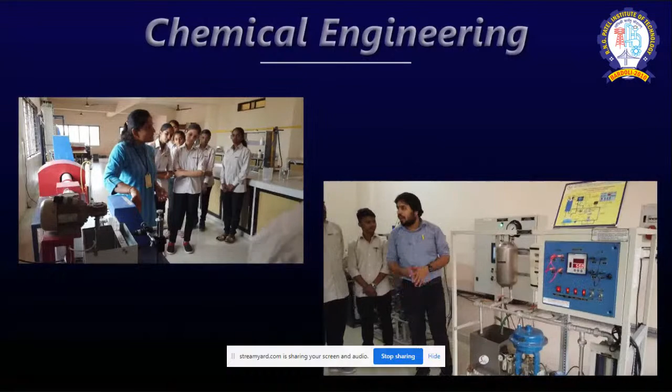The institute has 5 engineering streams: chemical engineering, civil engineering, computer science and engineering, electrical engineering, and mechanical engineering. It has 7 departments, including science and humanities and workshop, with a dynamic curriculum, a robust and talented pool of faculty members, and state-of-the-art infrastructure in all departments.

It is well known for imparting quality education, active research, and nurturing students for holistic development, achieved through student engagement tools like continuous evaluation, practical-oriented learning, departmental electives, soft skills development, and many more.

Recently, RNGPIT has started an AICTE approved and Gujarat Technological University affiliated 3-year industry-oriented graduation program, Bachelor of Vocation, based on skill development higher education. The institute has 3 BVOC courses: BVOC in software development, BVOC in production technology, and BVOC in refrigeration and air conditioning.

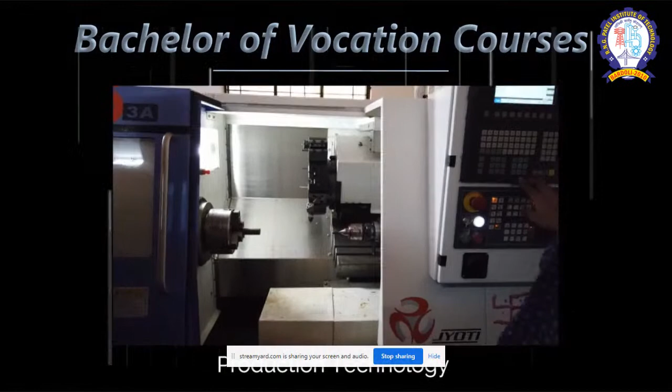The institute has organized 144 expert talks, 165 industrial visits, 90 workshops, 76 seminars, 32 STTPs, and 20 faculty development programs till today. The institute is proud of its academic results.

RNGPIT is continuously securing top rank at state level and zone level in Gujarat Technological University.

India's first common engineering facility center, governed by Setu Foundation, is being developed at our college campus.

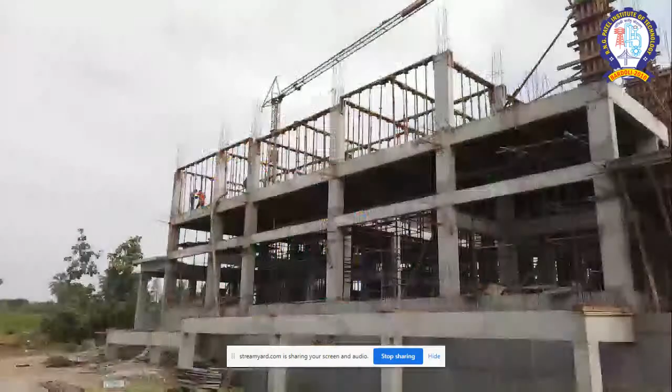The institute has signed MOUs with UGEC Powermax Private Limited Vadodara for skill development and industrial training in wind energy, with Aspiring Minds Gurgaon for job placement, with Trivedi Global Education Mumbai for guidance on higher education abroad, with E-Yantra IIT Bombay for development of a robotic laboratory, and with Reliance Jio for development of a recruitment and training center in the field of ICT.

Training and placement cell of the institute is active and alive. RNGPIT has organized 2 job fairs in association with Directorate of Employment and Training, Government of Gujarat, and NG Patel Polytechnic, and 2 IT job fairs in association with Surat IT Company Owners Association, SICO Surat.

The institute has started an SSIP cell for development of innovative projects and patent generation. Various projects done by our students have been presented at National and International Expos and Enclaves.

RNGPIT has established an NPTEL local chapter for various online courses provided by IITs. The institute has run various skill development courses free of cost under Pradhan Mantri Kaushal Vikas Yojana, approved by National Skill Development Corporation.

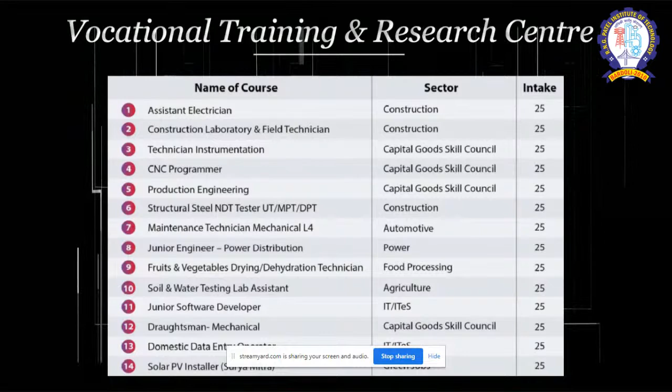RNGPIT has developed the Hansaben B. Poonawalla Vocational Training and Research Center with 14 advanced, well-equipped laboratories.

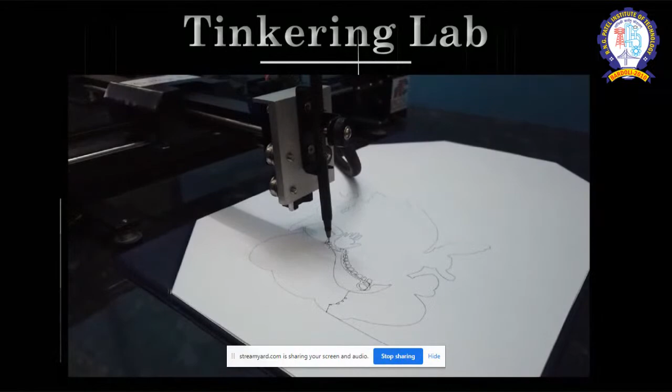The institute has developed a Tinkering Lab in association with the Student Startup and Innovation Policy Cell, Gujarat State, in which students can enhance their knowledge in the fields of IoT, robotics, artificial intelligence, 3D printing, calligraphy, and many more.

The Chemical Engineering Department of RNGPIT is recognized as a Schedule 1 Environmental Auditor by Gujarat Pollution Control Board Gandhinagar since 2012. The institute has around 40 industries allotted by GPCB for their audit work.

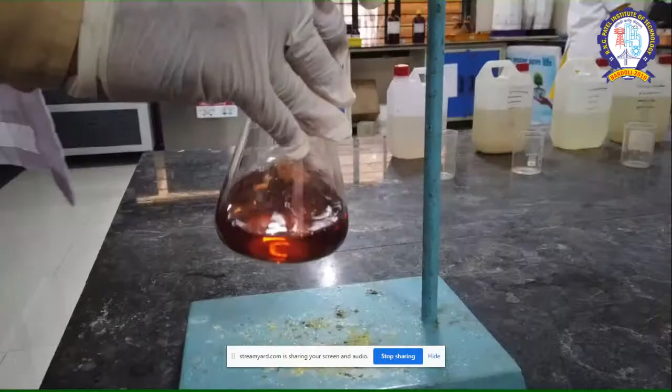The NABL accredited environmental audit consultancy laboratory and civil material testing laboratory of the institute have acquired ISO 9001-2015 certification.

There are many achievements done by faculties, awarded with gold medals. Every year, students are also facilitated with gold medals.

Hi, I'm Shweta, and I'm a software engineer in Silicon Valley. I did my master's in computer science from California State University, Sacramento, and my bachelor's of engineering in computer science from FETR, which is now affiliated as RNGPIT.

I have been asked to share my thoughts on two key areas. The first one was campus life. I can definitely say it was both fun and studies. Studies in the sense that we had to prepare for Viva, GTU exams, and for writing essays.

The institute was awarded the Appreciation Award for Green Campus at Energy Expo by South Gujarat Productivity Council. In our campus, there are more than 3,000 trees planted and 194 solar panels with 65 kilowatt capacity for utilization of energy.

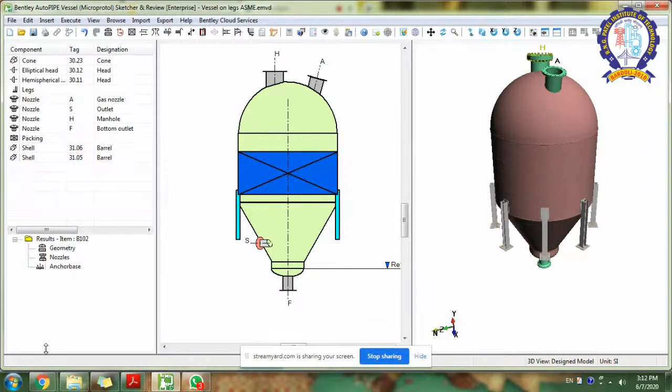Among these, we will look at some highlights of the nozzles, which is nothing but an opening in the pressure vessel. It can be of any size or any shape. So we will start with our main idea and topic.

What is an opening? Opening is nothing but the nozzle - some kind of opening done in the pressure vessel. What actually happens when you make an opening in a pressure vessel? The membrane stress field gets disturbed due to the pressure. The pressure is equated all over the pressure vessel. When you puncture the pressure vessel to create an opening, the membrane stress gets disturbed, and at the opening area, stress concentration occurs.

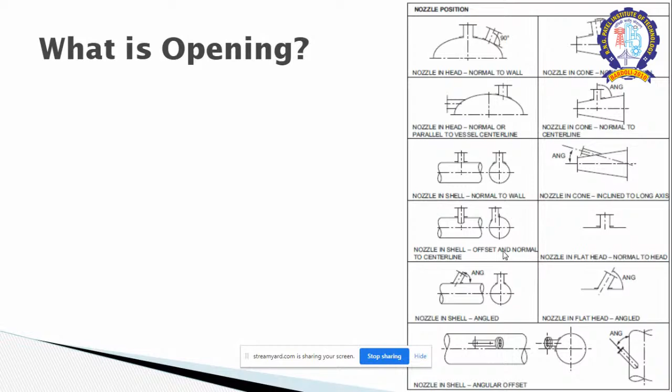Based on the arrangement we have to select the proper designing method. See this, so somewhere in a flat head also there is an opening. This is an example. The nozzle is at an angular position, not normal. For the similar flat head, this kind of various types of nozzles we have to design. So these are the various types of nozzles used in the pressure vessel.

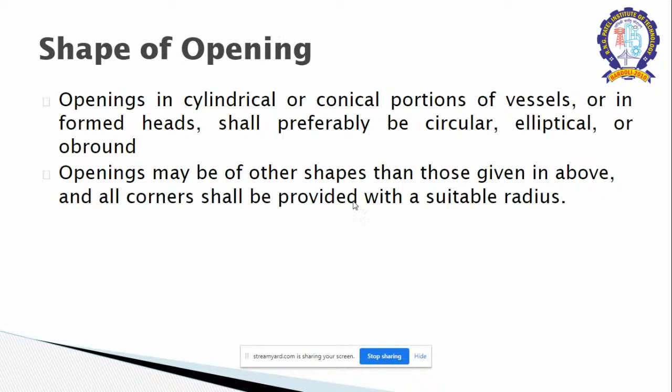Now, what kind of shapes will be the opening? Normally, the cylindrical opening is found in the pressure vessel, but based on the requirement, there can be a circular, elliptical, or obround opening. So, the pressure vessel can be any size and shape, but all corner radii shall be provided with a suitable radius for smooth stress concentration.

Now, how to design the nozzles and what will be the correct method? There are various types of codes available internationally. You can see ASME, American Society of Mechanical Engineers, Boiler and Pressure Vessel Code, Section 8; or EN 13445 for Europe, CODAP for France, JIS standard for Japan, Indian Standard IS 2825. There are various codes available. Among these, the most popular is the ASME BPVC code, Boiler and Pressure Vessel Code, Section 8, Division 1, 2, and 3.

Division 1 is used for general and standard type pressure vessels. Division 2 is for somewhat higher pressure, above 10-20 MPa. Division 2 is used there. Division 3 is for more than that, about 100 MPa, something like that. So generally, Division 1 contains lots of equations and derived formulas for designing pressure vessels. Division 2 is a mix of calculation-based formulas and FEA, finite element analysis. There is a very vast field of finite element analysis for pressure vessels.

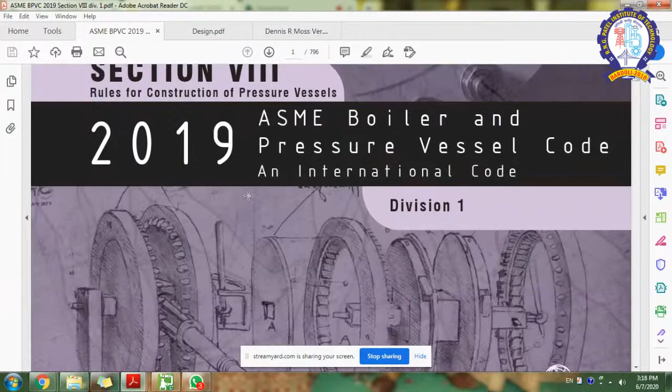Now we will see what exactly ASME Section 8 Division 1 is. This is the code, ASME Section 8 Division 1. This is the latest version, 2019. Every 2 years ASME will revise or re-edition the code. So the next code will be in 2021. This code will guide us to do some calculations.

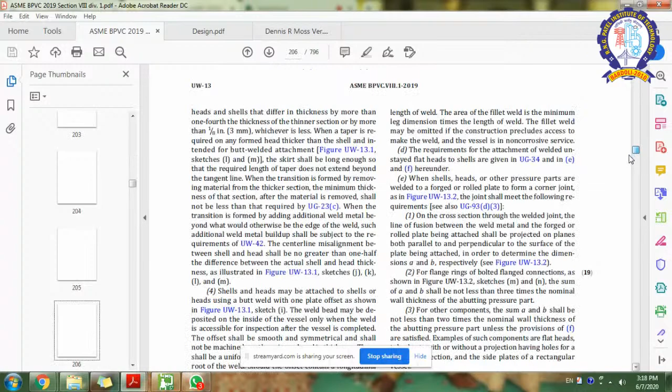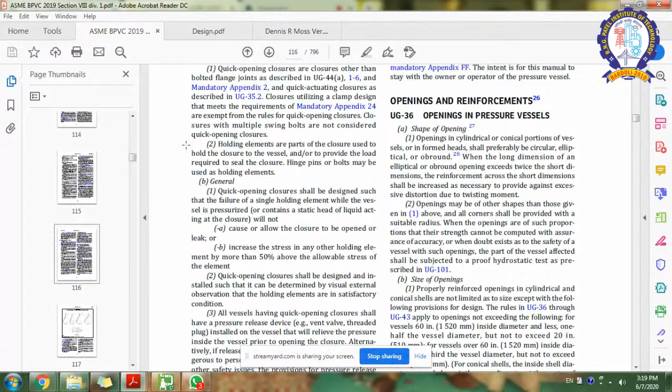UG-36 to 45 will give you how to derive and calculate the nozzle and its reinforcement. So this is the section for the opening and its reinforcement. Based on this code, we will go ahead.

So the scope UG-36 to UG-45 contains the formula for the vessel which is 60 inches in diameter, and the nozzle size less than one half of the vessel diameter, but not exceeding 20 inches. For vessels greater than 60 inches diameter, the diameter of the nozzle shall not exceed 40 inches, as well as one-third of the diameter. So these are the conditions for the applicability of ASME Section 8 Division 1 UG-36 to UG-45.

If the opening does not fall under this clause, then we have to move ahead with Appendix 1-7. This is also in ASME Section 8 Division 1. Appendix 1-7 is covered only for the radial nozzle, which is perpendicular to the vessel wall, and the ratio Rn/R does not exceed 0.7. Rn/R is nothing but the inside radius of the nozzle upon the inside radius of the vessel. It shall not exceed 0.7.

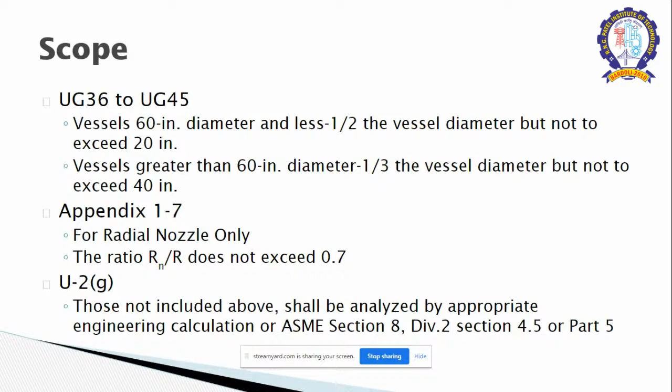ASME applies certain limits for which we do not have to perform the nozzle calculation. That is, openings in vessels not subjected to rapid fluctuation in pressure do not require reinforcement under the below condition.

First, 89 mm inside diameter of the nozzle in the vessel or shell, which minimum required thickness is 10 mm or less. Second, for the 60 mm inside diameter of nozzle,

vessel required minimum thickness of 10 mm, with some limits. This is when there is multiple openings, then ASME gives us the criteria of what should be the minimum center distance between two openings. That is described over here.

It is 1 plus 1.5 cos theta into d1 plus d2 for the cylindrical and conical shell, and for the doubly curved shell or formed flat head. Doubly curved shell means the head or dish on the bottom and top of the pressure vessel, which is actually a distance of 2.5 times d1 plus d2.

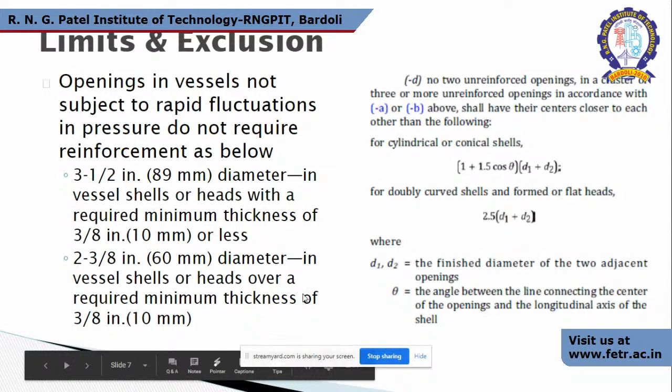You cannot give over reinforcement. There is some limit specified in the code about the limit of reinforcement, which I can show you in the code.

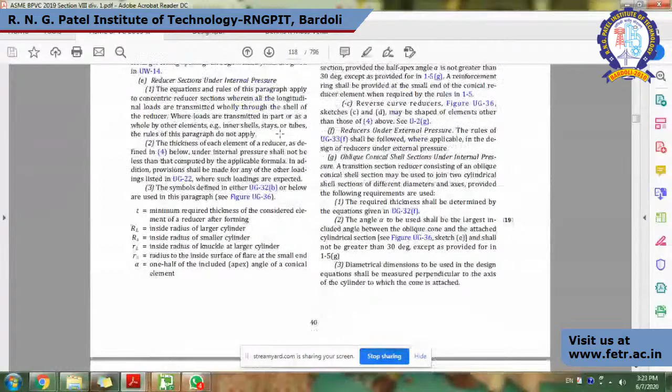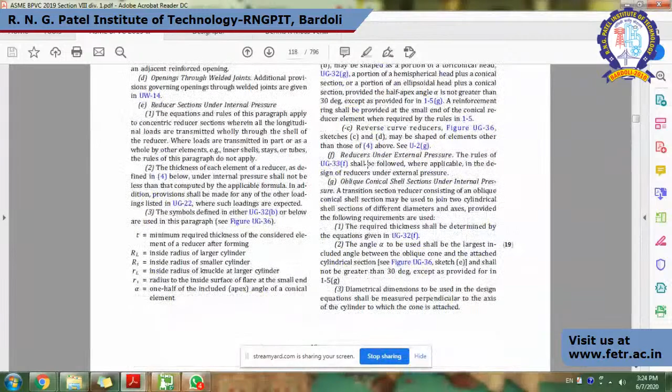That is 2.5 times of thickness and 2.5 times of diameter. This is the reinforcement limitation, 2.5 times of thickness and for the diameter.

Now, what is reinforcement? Reinforcement is the calculated strength given by adding area at the opening side. When you puncture a hole in a pressure vessel, the stress gets disturbed.

So to overcome this problem, we have to provide additional area at the opening. So you can see in the figure, this is the vessel with the opening. At one side of the center line, we have shown the set-on type nozzle. On the other side, the set-in type nozzle. So here is the concept of reinforcement.

You can see this is the area required. When you puncture a hole in the pressure vessel, this much area has been removed. So this is the calculation formula from which you can see how much area is required to give as additional reinforcement.

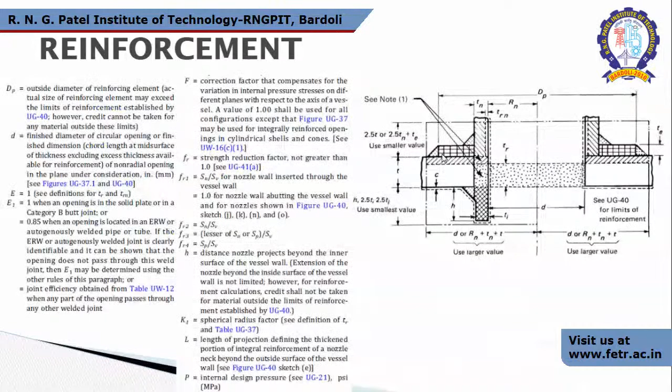Now, the second thing in strength calculation is the welding strength calculation, whether the welding load of the pressure vessel is actually adequate or not. So if we imagine this is the vessel wall, this is the nozzle wall, this is the reinforcing pad, now if the vessel fails, what will be the minimum leakage path for this arrangement?

ASME indicates three types of leakage path. First, if the vessel leaks, it shall be from this point to this one, from nozzle wall, reinforcing pad, to this part. Second can be from vessel wall to reinforcing pad to atmosphere. Third can be through vessel wall to reinforcing pad in a tangential manner. So these are the three possible leakage paths.

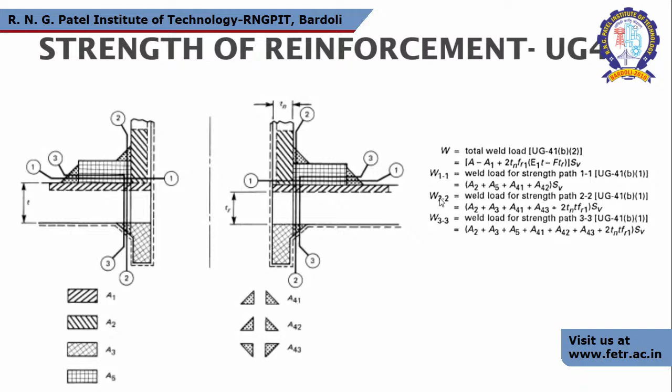Based on this, the total welding load is given in ASME UG 41.B2. This is the additional thing to strengthen the weld, out of which the maximum shall be considered. Now, the nozzle neck thickness.

ASME specifies a UG 45 table. As per calculation you may have taken some thickness for the nozzle wall, but ASME specifies the minimum thickness of the nozzle based on practical approach and experimental analysis. These minimum required wall thicknesses are specified as per the nozzle size. So your designed thickness shall not be less than these specified values.

Another criteria given by ASME is TA, TB, TB1, TB2, TB3. What does it mean? TA is the minimum required neck thickness for internal and external pressure, pressure can be internal or external based on the requirement. TB1: if the vessel is for internal pressure, then the nozzle neck, based on its attachment, the minimum thickness can be as per UG 16B. TB2 is based on external pressure, and TB3 is as per table UG 45.

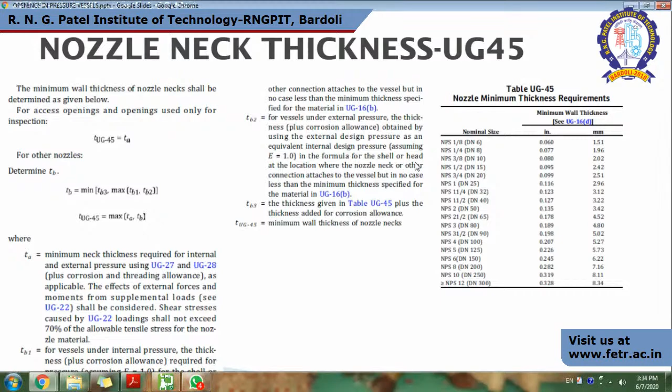Now we will see some calculation, how to perform the calculation of a pressure vessel. This is one type of model of the pressure vessel, here you can see various types of nozzles. This is tangential, this is straight nozzle, this is at an angle, nozzle at angle, this is bottom outlet nozzle, this is some kind of auxiliary nozzle. So this is a 3D model, and this is the 2D model of the nozzle with the pressure vessel and some kind of reaction arrangement.

There are various software available with the company, but it is based on Excel sheet calculation and more. So when we see the calculation...

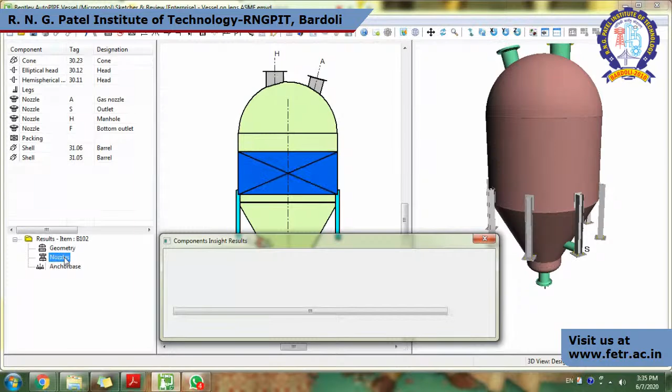When we see the various types of inputs, there you have to specify which type of nozzle this is. Based on the nozzle, ASME gives certain formulas, like for the process nozzle there is a certain formula, for manhole vessel entry there are certain formulas, vessel with nozzle with blind flange, with instruments, inlet outlet, and all these options.

For reinforcement, vessel with reinforcement pad or without reinforcement pad, vessel can be with or without reinforcement pad, with long welding neck, with extra thickness provided, butt weld type, self reinforcement, and T type. There are various types of nozzles available with various types of reinforcing elements, whether it's set-in type or another type.

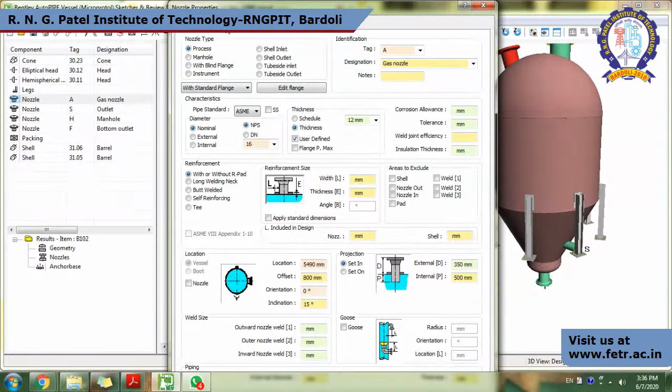So based on this, the first thing you have to design is this for the calculation. After that, material selection: you cannot use plate type material for the nozzle, for a small nozzle, for less than 500 mm, you have to select pipe type material.

So these are the nozzle materials. For the carbon steel type of material, for stainless steel it is SA312, type 304, 316, which are the austenitic steel type. You can see it in the iron carbon diagram. So these are the types of material for the nozzle wall.

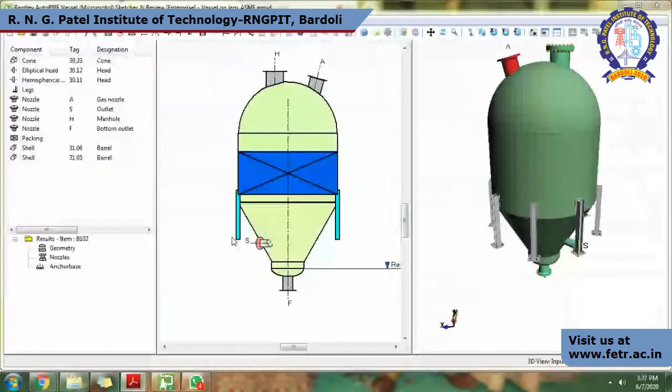So let's see the calculation which we have discussed. The calculation is formed based on that. This is the same vessel which we have seen. So let's see the calculation.

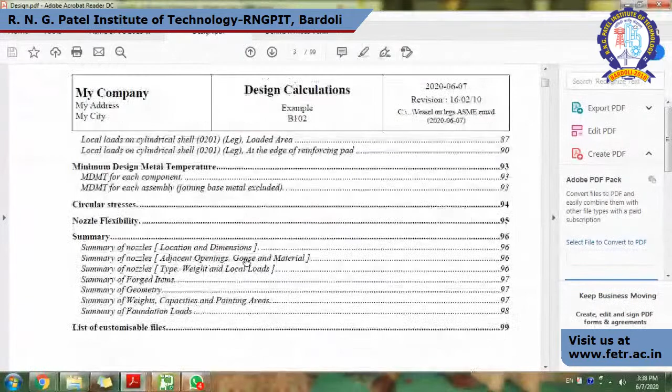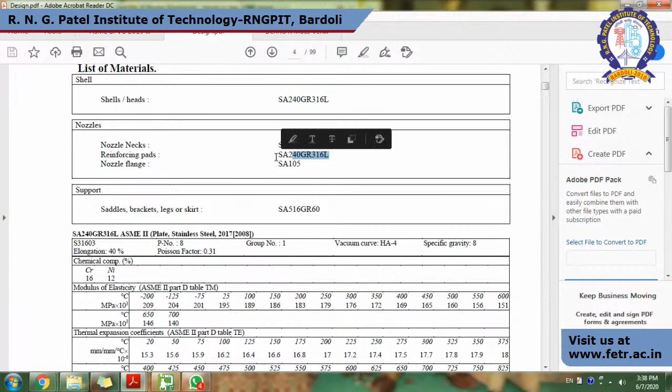These are the materials of the shell, head, nozzle necks, which is our area of interest. Reinforcing pads, which is the reinforcement for the nozzle. Nozzle flange SA105.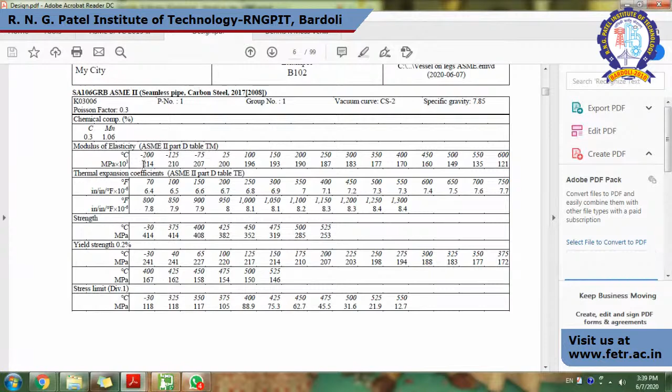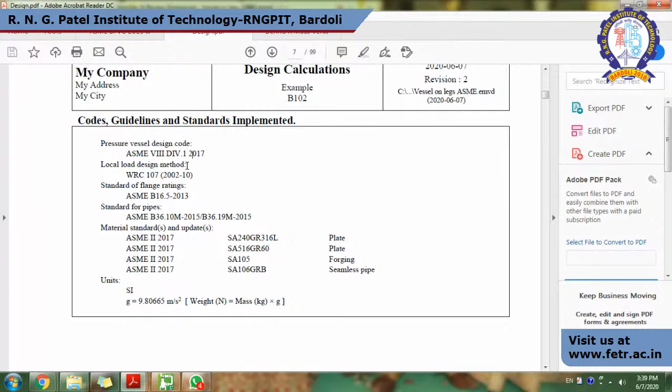Sorry, strength will decrease. So this is the code and standard used for the calculation. The pressure vessel design code is ASME section 8 division 1, 2017, and this is the material grade used for the calculation.

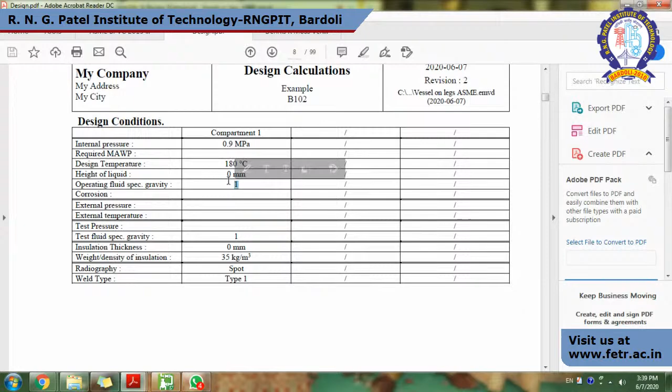This is the required pressure. The pressure is 0.9 MPa. The design temperature is 180 degrees centigrade. Height of liquid is 0, and operating fluid specific gravity is 1, which is for water. The density of the insulation is given, and the radiography spot, we will discuss later.

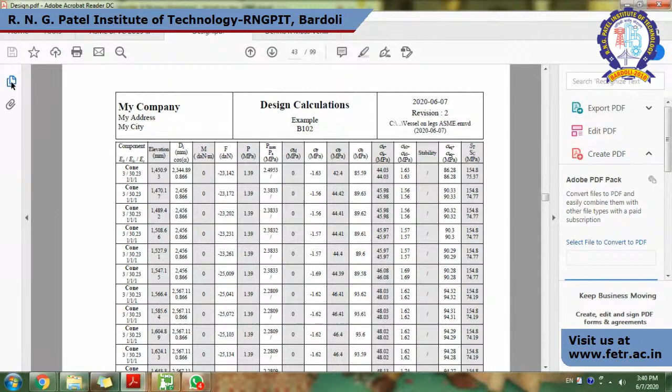So let's see the calculation of the nozzle and its reinforcement.

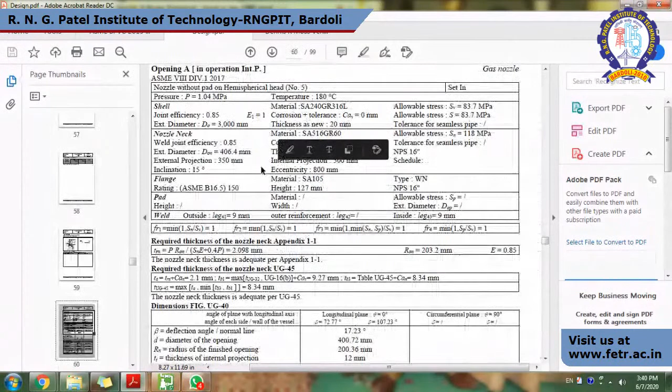So these are the various input parameters used for the nozzle reinforcement calculation. Pressure, we have seen earlier, is 0.9 MPa. Then why is it 1.04 MPa here? It is nothing but the addition of the static head. When you fill the vessel with some kind of fluid or water, the static head will generate. So you have to also take into account the static head with our required internal pressure, which was 0.9 plus 0.14 MPa as a static head.

So this has to be included for any type, whether it is gas. Even for water, you have to take the static head, because when you force the pressure vessel, it always has to be tested under hydro test condition before it reaches the customer. So it is necessary to calculate the pressure with the static head only. So that is the clear thing.

Then the shell joint efficiency, it is for the welding. It will come later. The material is SA240 grade 316L. Based on the temperature, the allowable strength is given here. The corrosion we have taken as 0.

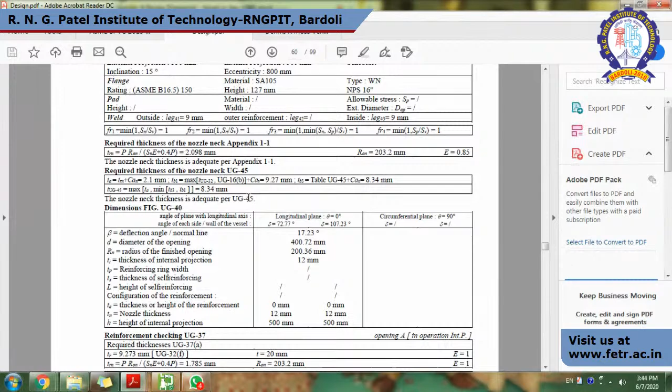But what about the nozzle to pressure vessel junction? That is actually called a reinforcement calculation. This is different from here. So for that calculation, we have taken a few additional data points.

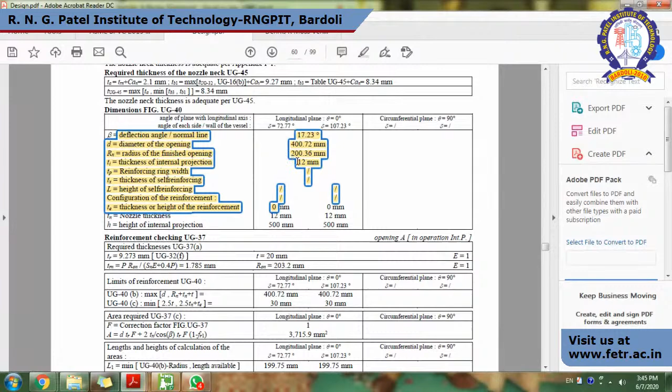This is the nozzle at a degree of 17.23 degrees from the vessel centerline. This is the diameter of opening. This is radius of the finished opening. Internal projection, because 12 mm thickness of the pressure vessel, which we have seen over here. The similar is this.

This is the nozzle thickness, 12 mm. Height of the internal projection. The nozzle is projected inside 500 mm. So this is what this is.

This is the required thickness of the nozzle based on this Rn, and this is the limit of the reinforcement which we have already talked, which is minimum of 2.5 times thickness of nozzle plus thickness of external shell. This is a limit in terms of the width of the reinforcing pad, which comes out of diameter of the opening or the radius of nozzle plus thickness of nozzle plus thickness of shell, which specifies a limit. Over there, if you provide a reinforcing pad, that will not affect the strengthening of your reinforcement.

Similarly, for the thickness, if the required thickness is 30 mm and you have given a 40 mm thickness, then the calculation shall be done on 30 mm only. You cannot take the advantage of the additional 10 mm. So this is the maximum limit of the reinforcement. You can play for the reinforcement in this region only.

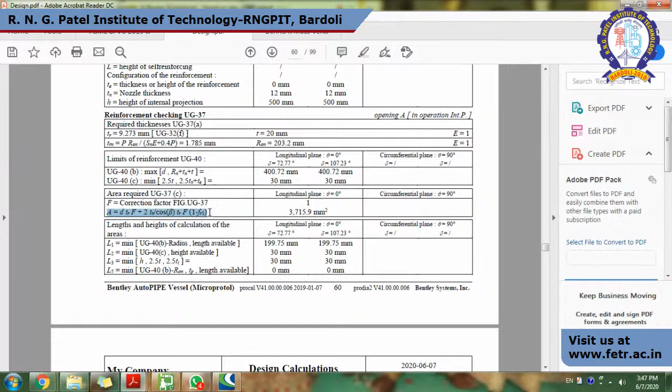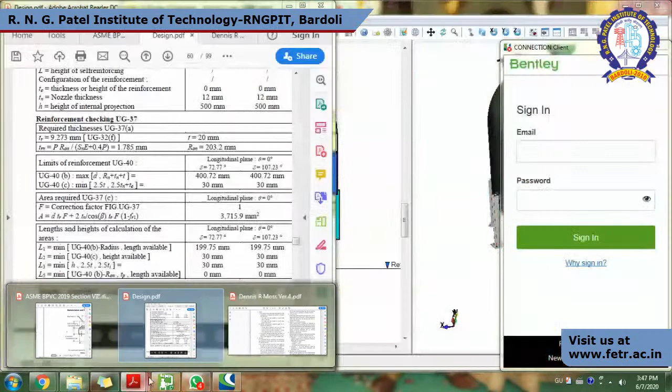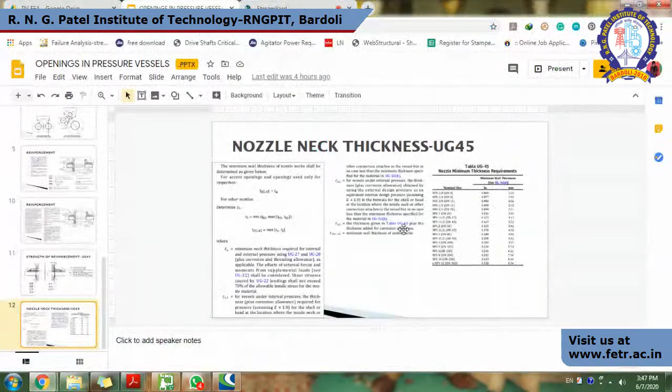Now this is the area required formula, which we have seen earlier. Let me open both together for easy understanding. So this is the area required, A. This is the formula, and based on this formula we are going ahead.

This is a similar formula, only Tn by cos beta is based on how much the angle of the nozzle is, that is to be taken. Why is this cos beta factor over here? This is the actual thing which we have to see.

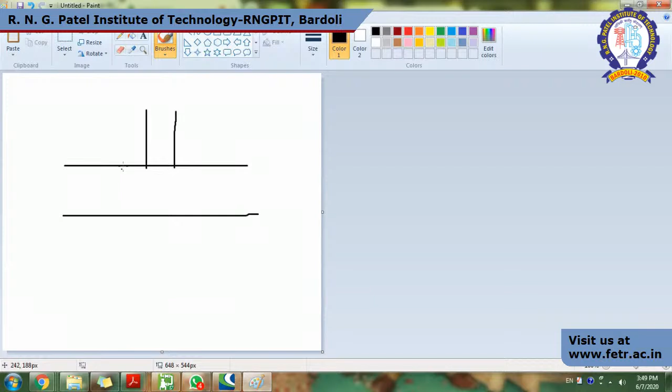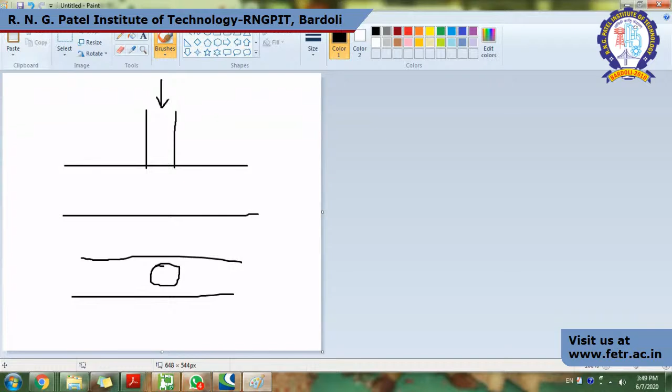Suppose this is the vessel and this is the opening. For this type of job, circular, it's a simple thing. But when the vessel is this type and your nozzle is attached like this, what will be the shape of the opening? The shape is like an oval shape, right? So for this oval shape, the finished opening diameter shall be the maximum. So this is the maximum diameter.

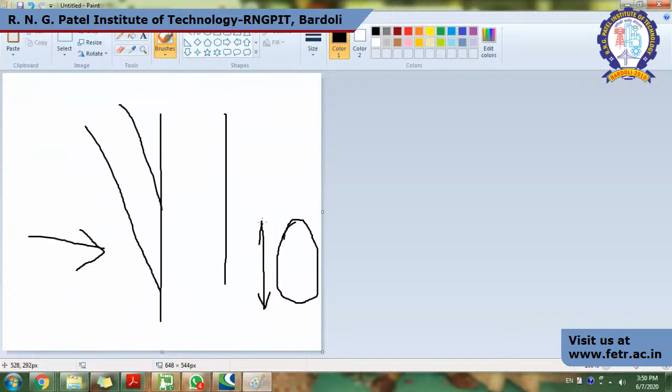There is a change in the equation based on this. The cos beta is the factor which takes into account that the maximum diameter will take place. So based on this, the area required will be higher than what it will actually be in the cylindrical type opening. So this is what we have done here, the area required.

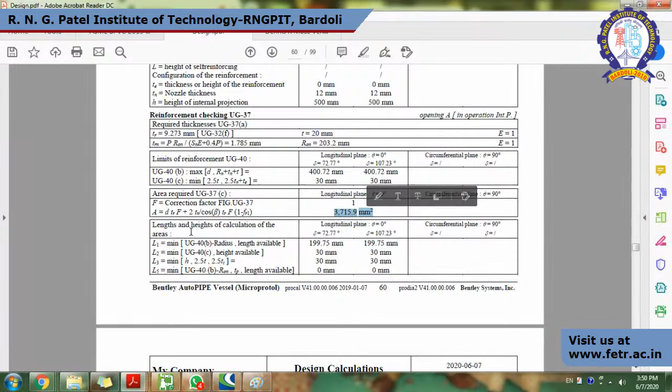Now this is the others. A1 is the area available in shell or head, right? We can see A1, area available in shell or head based on our safety factor. This is A2 and A3. A2 and A3 are nothing but nozzle projecting outwards and nozzle projecting inwards. So our nozzle is 500 mm projecting inwards and outwards. Based on this, the calculation is done, nozzle projecting outwards, nozzle projecting inwards.

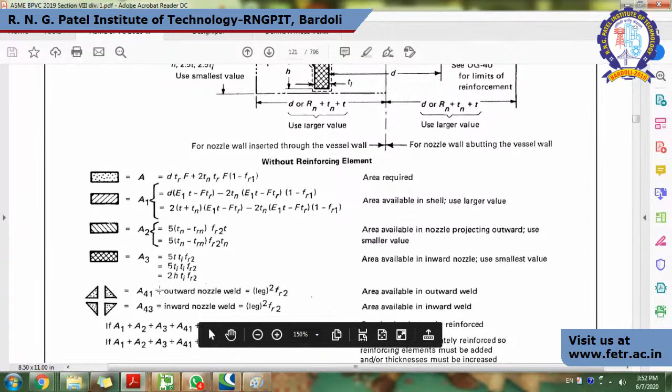A41, A42 and A43 is the welding area. So you can see this is welding 41, 42 and 43. Why 42? This is because the nozzle is welded inside also. So A41, A42, A43, this is the area. A5.

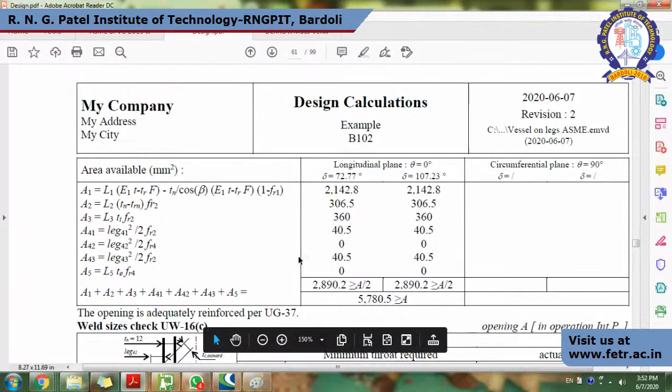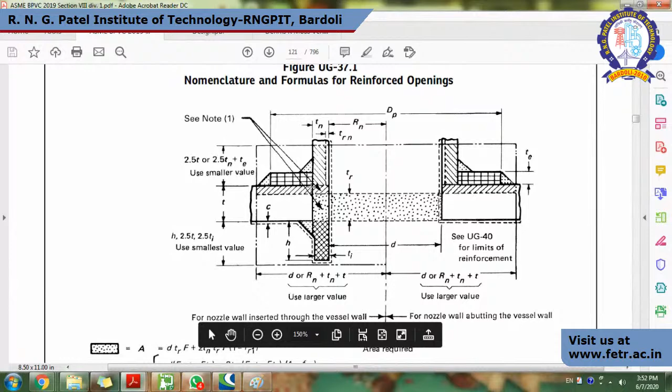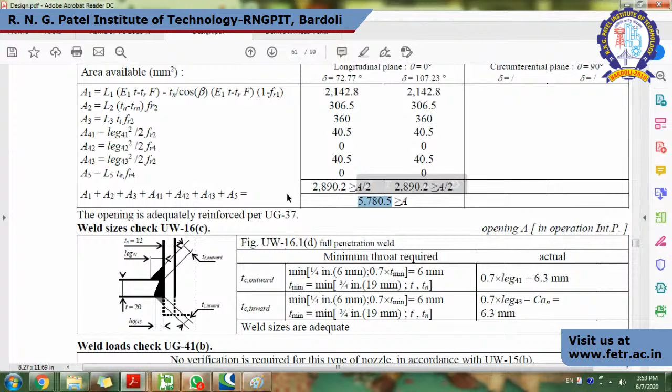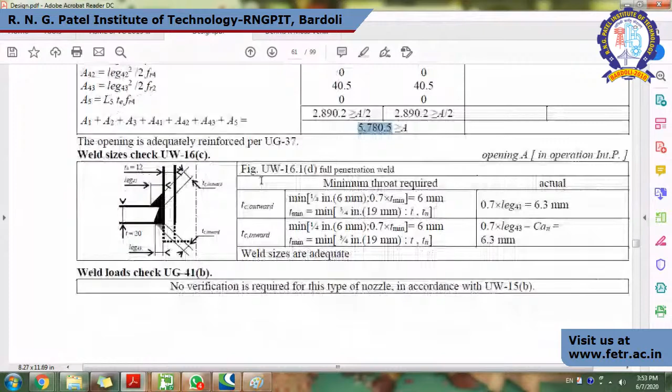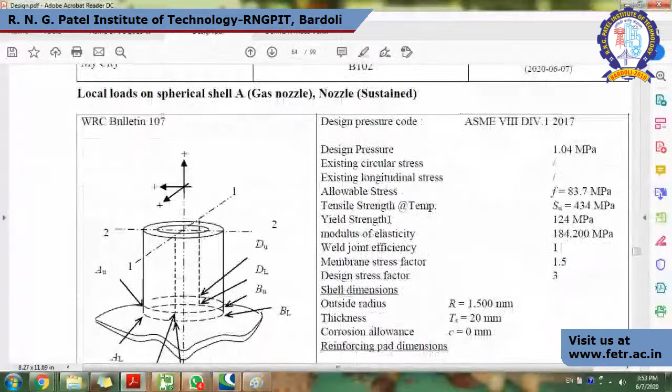So we can say that the opening is adequately reinforced as per UG-37 of ASME Section 8 Division 1. Now Section 8 Division 1 says... So this is one type of nozzle.

Now we see the second nozzle. The second nozzle is similar, but in this case the shell thickness is higher. Other things are the same. The nozzle diameter is less than earlier; it was 16 inch, this is 8 inch. So here this is tolerance for seamless pipe.

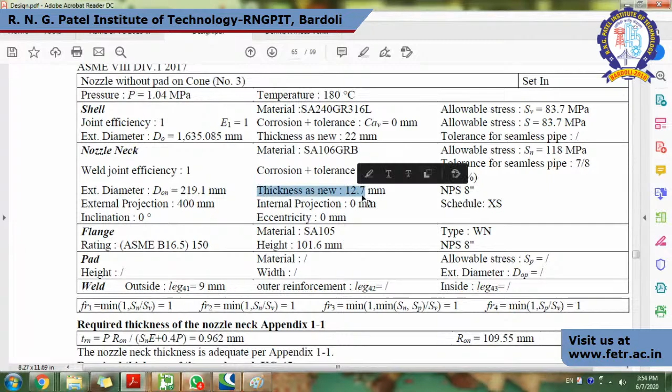Actually, whether it is a welded pipe or seamless pipe, welded pipe has a tolerance value of 0. For the seamless ready-made pipe, it has a tolerance of 12.5%. So we have to take 12.5% less thickness from the nominal thickness. That is what we have to take care of. Other things are similar.

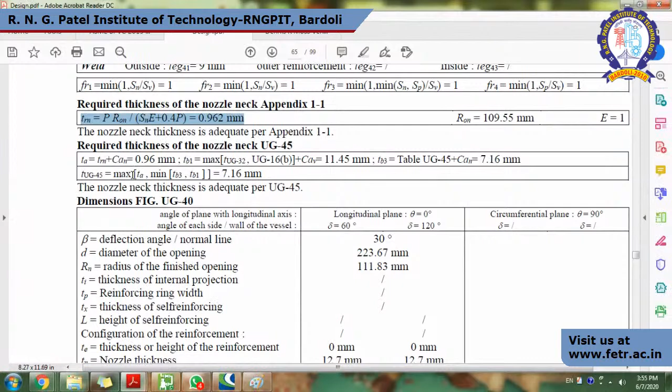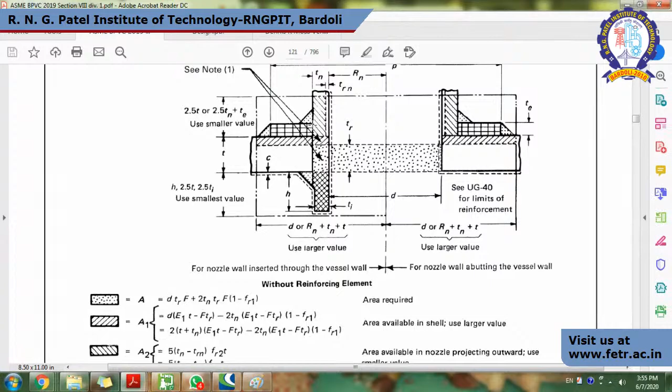Whatever we have done, the process is similar: calculate nozzle neck thickness, calculate the required thickness of the nozzle neck as per UG-45, TA, TB1, TB2, TB3, and out of this, maximum of TA or minimum of TB3, TB1 shall be taken as per the table of UG-45. Other things are the same, only the correction to be taken is that whatever area we have punctured out, that area shall be filled with additional welding pad or by giving additional thickness to the nozzle, inside or outside. That is the area which we have to take care of, and that is what we are following. There are various types of guidance books available on the website or other platforms.

One book is very useful for pressure vessel design, not only for nozzles but also pressure vessel design in general. You can note down Dennis R. Moss, version 4. You can find various formulas and other things about pressure vessels in Dennis Moss. Note it down and study it thoroughly. If you want to enter the field of pressure vessels, this book will be a reference for you.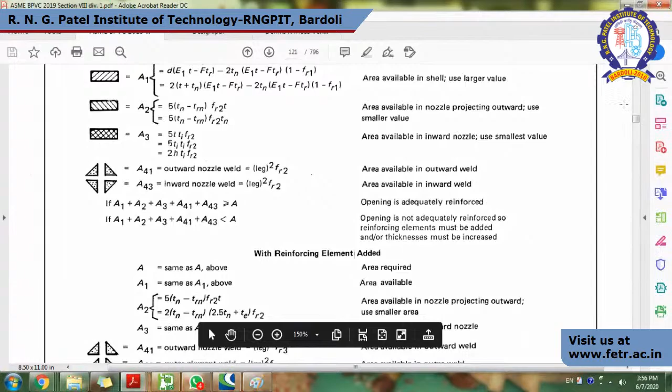Everything we have shown up to now is UG37 to UG45. Now let's see what appendix 1-7 actually shows. That is useful for higher diameter nozzles.

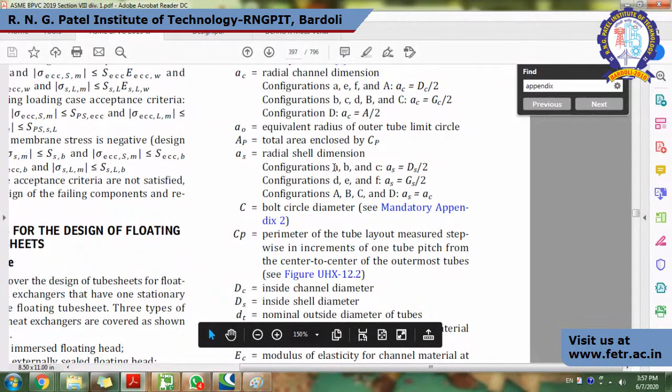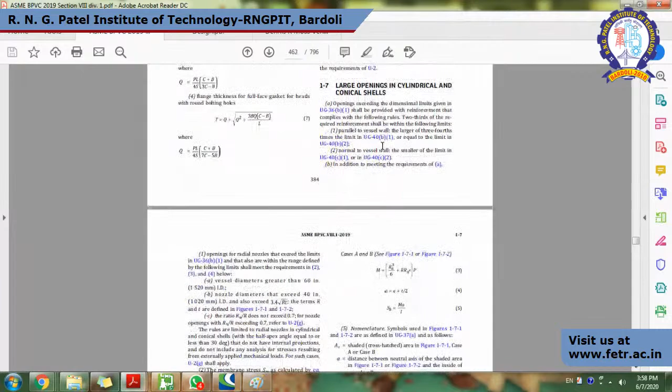So here it is. Appendix 1-7 is used for designing a high diameter nozzle, large opening in a cylindrical and conical shell. As we have discussed, where it is applicable and how much it is applicable - whatever we discussed is specifically applicable for nozzle diameter which does not exceed 0.7. These are the rules, and the nozzle shall be radial only. This is specified here.

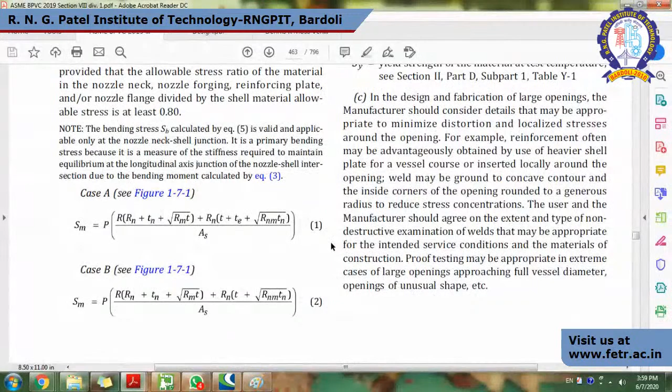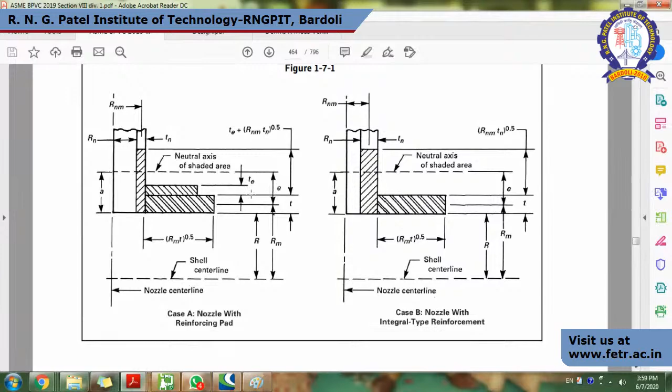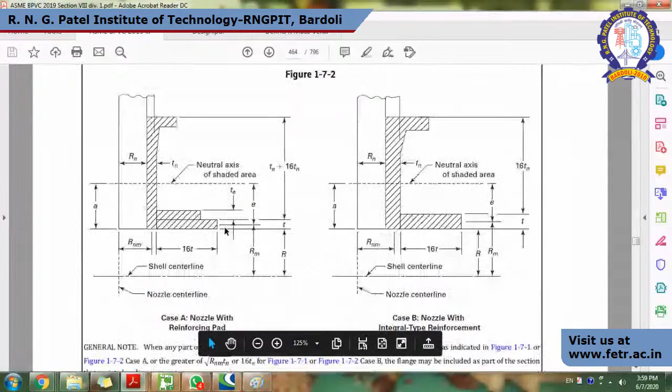For the calculation of stress, a few formulas are described here as per the case, and based on these formulas, you can simply find out the stress with one formula. This is case 1 and case 2. Case 1, case A is with the RF pad, case B is without the RF pad. Based on this, there's a formula for case A and case B. So based on this, the nozzle and its reinforcement calculation is done, and the phenomenon is the same - to give the additional area for both cases, but the equations are different for both cases.

1-7 is somewhat not more conservative than UG37 to UG45. So this is as per Division 1. Division 2 is somewhat similar to 1-7, and Part 5 is based on FEA. FEA gives various configurations and loading on the nozzles, and it is very rarely used.

Mostly in manufacturing and chemical industry, or fertilizer, or any industry, 90% of the pressure vessels are built on ASME Section 8 Division 1. The rest 10% will consist of European code EN 13445, or British code PD 5500, or Japanese code, or any other code, and ASME Section Division 2 or 3. So the rest 10% consists of these codes, but 90% of pressure vessels internationally are built on ASME BPVC 2019 Section 8 Division 1 only.

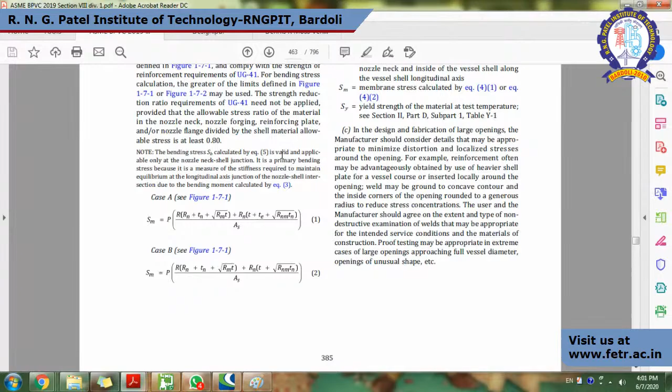So if you are entering the field of pressure vessels, you have to be knowledgeable in Section 8 Division 1. This is nothing but referring to the code, and you will get the idea of how easy it is. Once you go through it, you will find and enjoy the calculation. So from my side, that's all. You can give feedback on this topic later. Thank you.